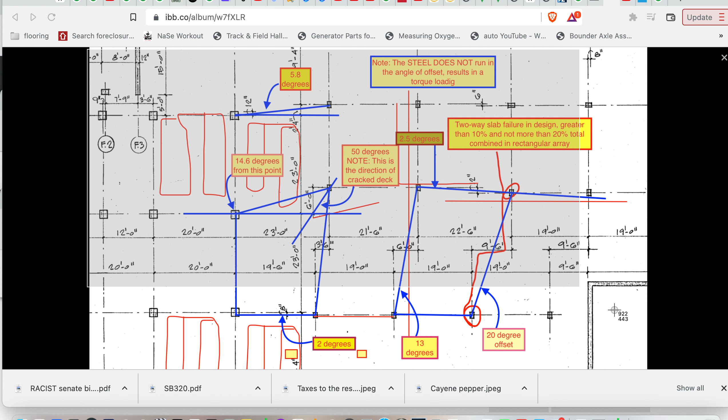If you look at this as a triangular array, meaning in this case I want you to understand it, it looks balanced. See the distance from here to here, from here to here, from here to here. If you measure, they seem pretty balanced, right? I did that once before in a video, but I wanted to understand the importance of it again.

So as I do this, the importance of this little triangle array. I'm going to put them on each one of these little corners. So if you load here, this works out. It's like it's equally distributing the load equally to all 4 columns.

Not equally, because this is one section, one length is longer than the width. But that one also. And as we get over here, it's just a clusterfuck. All right, let's go back to this one. See, that one's just about matched up.

This is an 8-inch offset, see the 8? So not quite, but 8 inches is within tolerances per ACI standards. Where's the one that's out here? Doesn't exist. The closest one is over here.

Using the offset method, I'm at 13 degrees using from this triangulation, from this area here. This one's 14.6 degrees from here. 50 degrees if I do it where it's supposed to be, which is here, and that's a 50 degree offset. These are just all over the place with offsets once you get out to the parking deck.

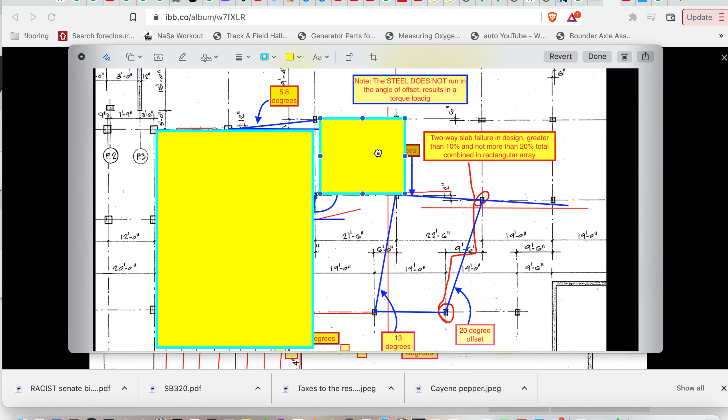Coming over to this one, we get this one. Oh, it looks like it pretty much works here. So this one is sort of working, except for it now has to do the work of the one that's behind it, this one.

Because there is no column there, there's a 6 foot offset here and over. So what's picking up this area here? What's picking up this area? Well, they're trying to share. This one's oblong, see the shape of it, this lighter blue I have here. So it looks like, ooh, let's see if I can do it this way.

Okay, so this is a lot more difficult. Okay, I can do this. Great, that's a loss. So I can do this.

Let's change that color because I can. Let's do that. All right, let's bring this one over. So what's picking up this wedge here? This little wedge shape. These are just a box.

It's nothing there. Well, there's vehicle loading there, there's planter box loading there. But what's picking up this detail here? What's picking it up? Well, nothing's picking it up. I'm sorry, it's being distributed by the reinforcement around it, but it's not. It's out of bounds for the allowable percentages. Two-way slab failure in design greater than 10% right here, and not more than 20% total combined in rectangular array.

So the question is, is this entire panel a rectangular array up to the construction joint? I would argue yes, because it failed as pretty much one.

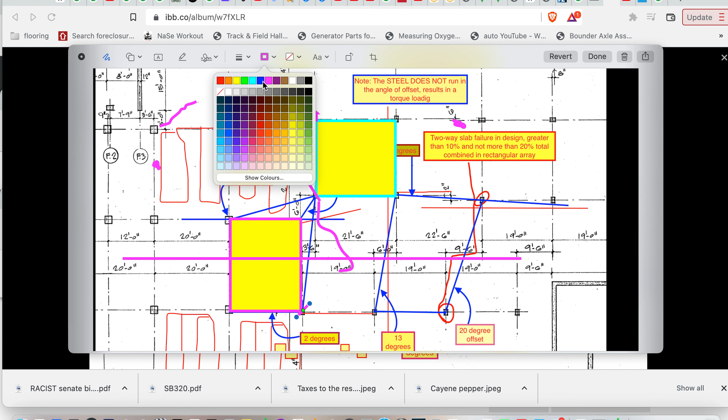So let's change colors, let's go with red. They're bent over. And let's go red there too. And will it do that? Yeah, so they're bent over in, well, it's sort of like this compass, this direction. So we can do that. Spin that around, and it's on top of the column, but it came from here, approximately right there, is where it lost its engagement.

1, 2, and we'll do this one. And there, over the column, it's anchored back to the right. So our anchor is here because this is where it stayed intact. So I'll have to move the circle over. Our anchors are here, and this is where it stayed intact.

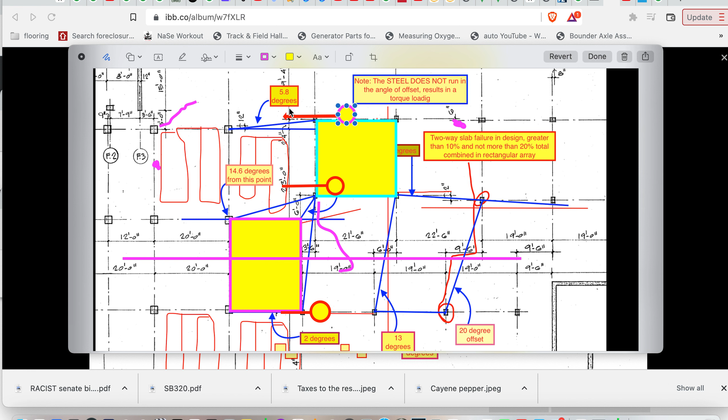And gave, this is our failure zone. Our failed section is down here. So this is our failed section. And can I do that differently? Failed section, and then we look at what's there, and then failed here. Failed section. So what's there?

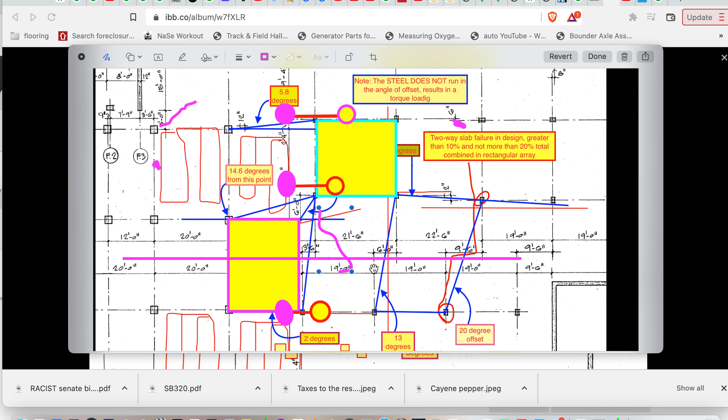We have car loading there. And then we have this one here where the Miami Herald released the imagery of the planter box, which is right forward of the column, maybe here, right about here. And its rotation indicator is that it puts just in this butterfly area, that this sagging here would create here, and this would be upon this whole plane, would create the sagging here, would create the rotation here on this box. Let's take a look at that in just a moment.

So why do I have that one up? Okay, I'm trying to get to it. And oh, it's overlaying.

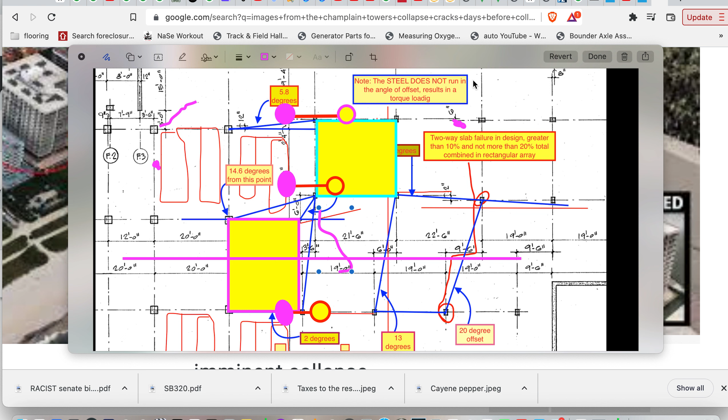I know what's going on. So in the background, let's just move that there. In the background, this is the Miami Herald's release. The boxes are not mine. This, like a zoom in, is what they did here.

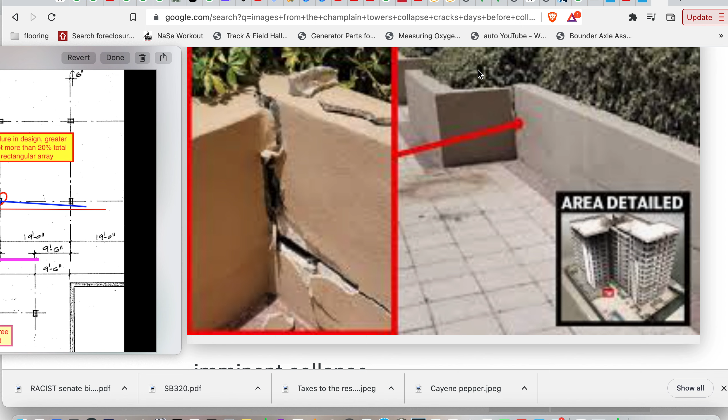So here's what they're zooming in here, and you can see that this is dipping down. So I'll give her some rotation back here or behind here. If we look at the material, the displaced blockwork, the rotation is down and away, and it's where the gates are, which is the mid span. The gates are about mid span of this column and this column, which puts us here.

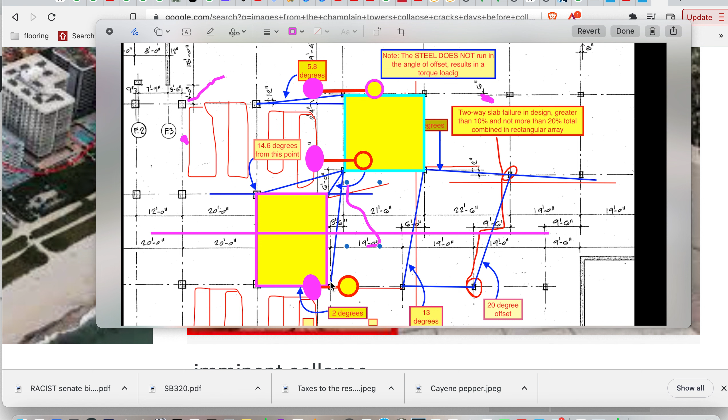So we get our deflection on our deck. Why do we get it there? Well, how can we get it there? I did a video stating, even though the fractures here, this appears to be our number one overloaded column. This one here, I chose that one. This is where I said the deflection would show the stress. But I called this one overloaded and I called this one stressed.

Because it has a bigger, larger - when I did all this zoning for this, I did like halfway between here and here is what I did. The back wall being equal across all of these, save this is 8 inches. So I didn't count that. I just went up halfway between this one over here. And then I pretend like a support was there, and I closed it off here.

So I went - delete that. So it went like this. So my initial one was like this, and let's change that. So it was like that. And I said, okay, well that doesn't work because this is further out. But this will be a zone.

So I said, okay, so this is kind of weird, I got to figure this out. What's the box there? And I made another box for it. And this box doesn't work. See, this is when I do a box from here to here. Well, it doesn't work. Here's this back support, and there's that degree, 5.8. So it really boxes out to here.

Remember, this rebar is not on a skew. It's 90 degrees, so I'm trying to work with that. And then here it goes here. So I'm like, okay, this still doesn't work. So then I have to use just odd shapes to try to figure out its mid-span. So I break it into chunks now.

Okay, I say, okay, well that's there, but there is no half from here to there. There is no other half. It goes clear up to here. Let's get rid of that now that you can see it. Let's move this out of the way.

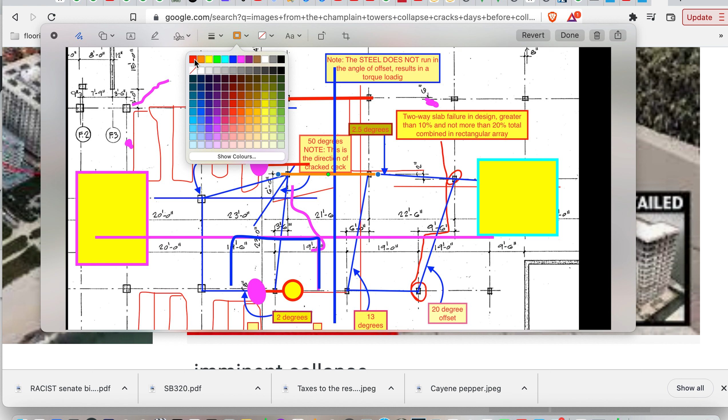All right, so I said, okay, wait a minute. Here's one over here then. Here is - let's do that. Let's just drag that down. Let's multi-purpose it. So there's that one. Let's turn this from red. So now multi-purpose it. Okay, here's a column. Here's a column. All right, so this reinforcement goes across.

It crosses this - maybe 1.5 pieces of rebar going across this head. All right, so it's something, and it's somewhere close to the critical shear zone. I'm like, maybe it gets 2 pieces, but it's still a hell of a span from here all the way to there. Remember, this is also just on the span itself. It's closer, as I move it over, it's closer to the critical shear zone of this, which would be more rigidity. But if I split the difference and go to the middle from this one to this one, and I

follow it up, I'm out of the zone on this one. I looked into them. I'm out. Say this is the critical shear zone. If it was really matted, built that way, which I think it was not. I think it was not. So this is still out of the zone, but this would be a little bit stiffer gradation, and then this would have a critical shear zone also, right?

But this is actually, wait for it, this is almost in the plane at the building where it would have been a BMA. And lo and behold, this is a step down. Let's see if I got that right. Yeah, that's the one catty corner to this one. No, the BMA's over here. The 6-inch step back. Oh, that's what I talk about in another video too. I don't know if you guys saw it or not. This is a 6-inch setback, and this is the one where they did the core sample. This is also where the floor transition or drop slab detail is.

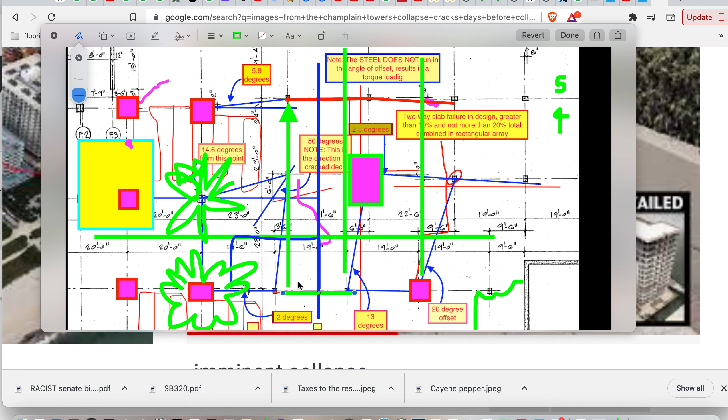Oh, the planter box. So it had been butted up to the planter box. They didn't remove it and put this down, as I understand. So the planter box had been different. Although I have a video that shows, kind of weird, the planter box is not there at all at one point. And I never shared that with you. I don't know where that came from. It's weird. Makes me wonder if they redid the planter boxes totally.

Let me remove some of this stuff. All right, that's it. Just wanted you to absorb that.